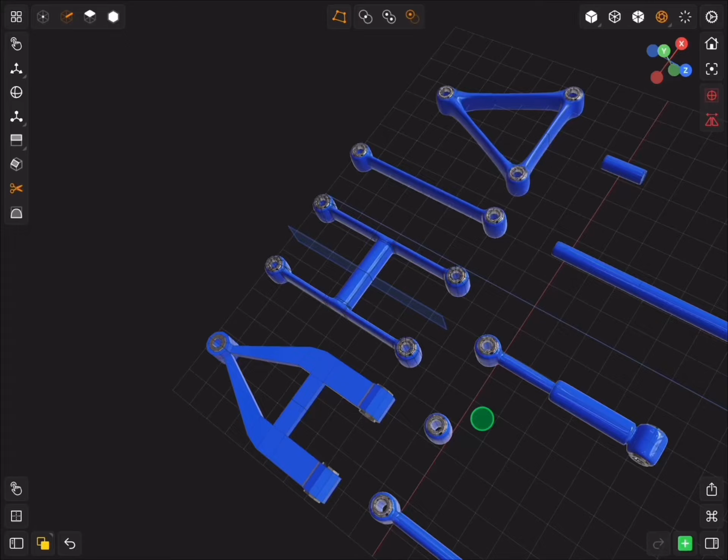Everything was going well until I added to this object.

In this tutorial, I will show you how to create hard surface kit bash using Valence 3D, so we can use it on later projects to speed up the process.

Add a tube, reduce the inner radius to 0.200 and change the angle resolution to 10.

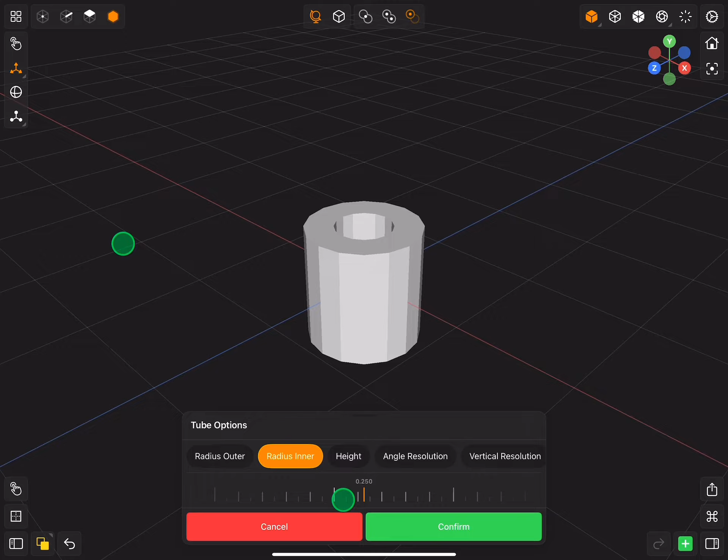Switch to face selection and select everything, then move it on the x-axis. Switch back to the mesh selection and you will notice that the pivot point is still in the middle, and this is exactly what we want.

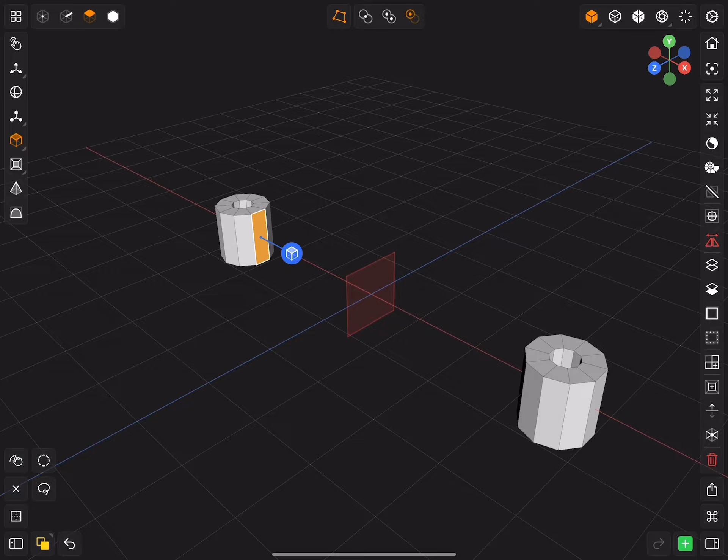Add a mirror modifier. Now select the face and extrude it. Delete the face. Select the edges and enable snapping by holding one finger on the empty space, then move it to the middle. Add loop cuts in the top and bottom of the tube.

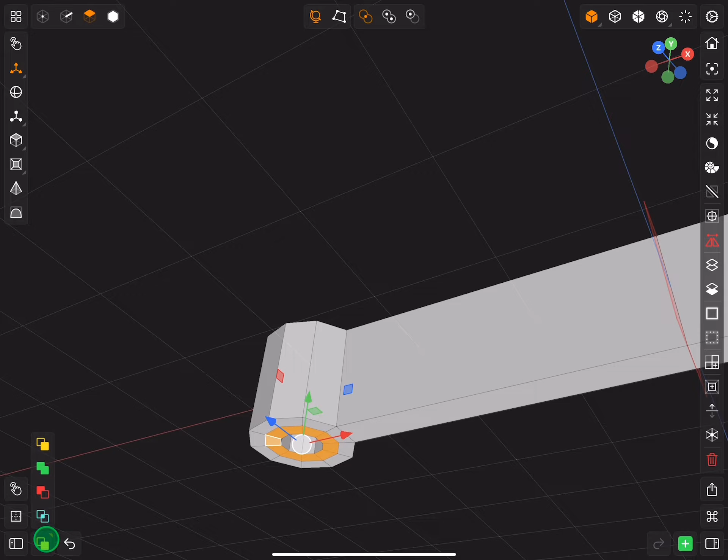Select the new faces and extrude them. Grow select one time and create submesh. Change the color and back to the mesh selection.

Duplicate it and move it away. For the next object, apply the mirror modifier.

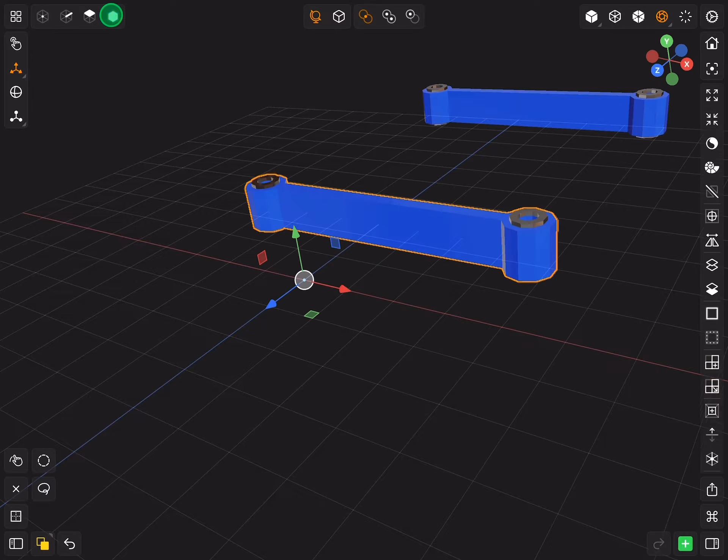Go to face selection, select everything and move it on the z-axis. Add a new mirror modifier and change the mirror plane to z. If you need to adjust the position, go to face selection, select everything and move it.

If you need faces in the middle of the mesh, select the middle edge loop and use the bevel tool. Now select the middle face and extrude it, then delete it.

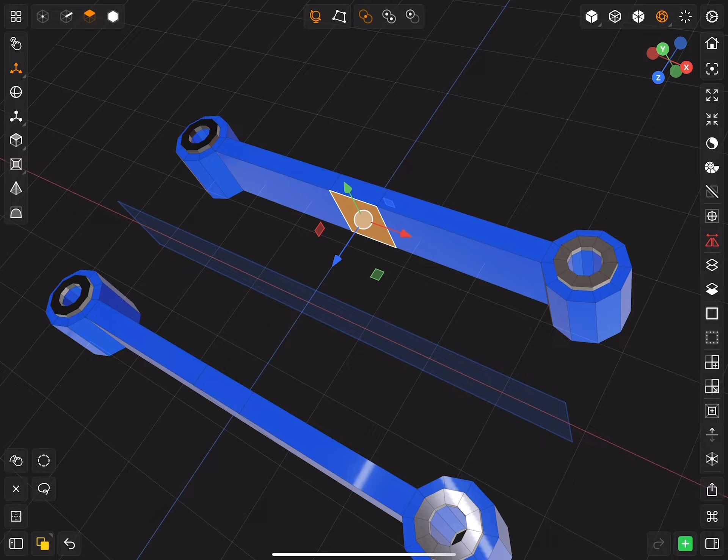Select the edges, move them to the middle while the snapping is on, then move this object away. Insert a new tube, just like what we did earlier, 0.200 for the inner radius, 10 for the angle resolution.

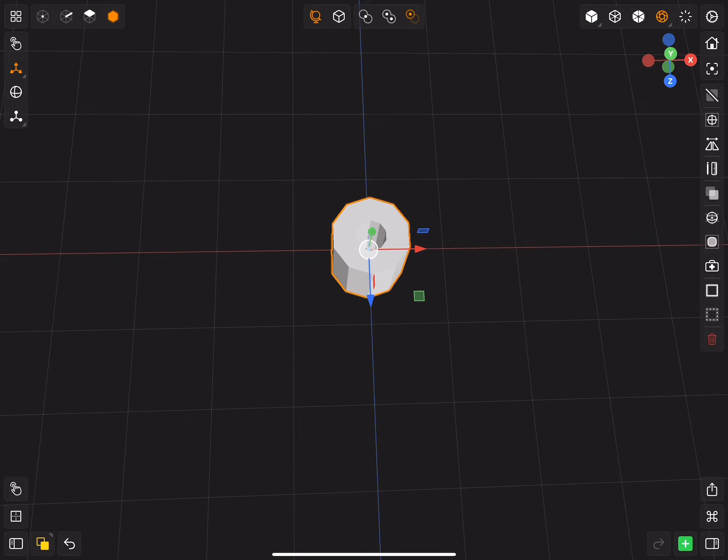Move it away from the center. Insert loop cuts in the top and the bottom of the tube. Select the new faces and extrude them.

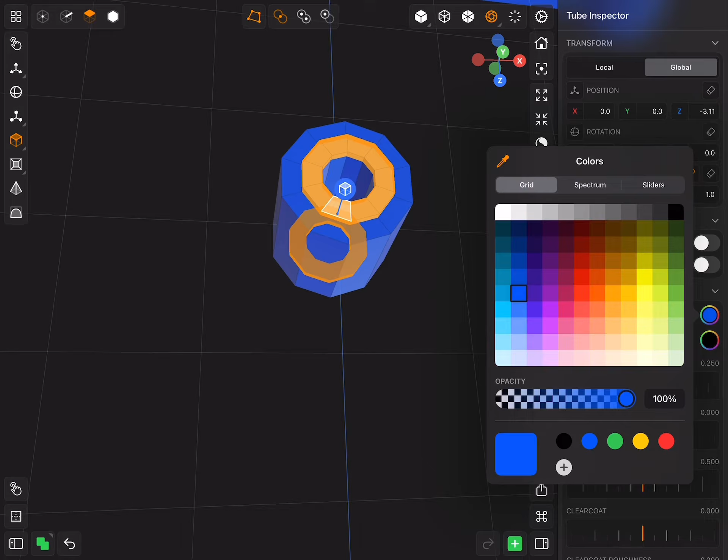Grow select one time. Create a new submesh and change the color. Duplicate it and move it to the back.

Go to face selection, select everything and move it to the right. Add mirror modifier, select the first tube, select half of the vertices and delete them. While still selecting the half tube, select the other one and join them.

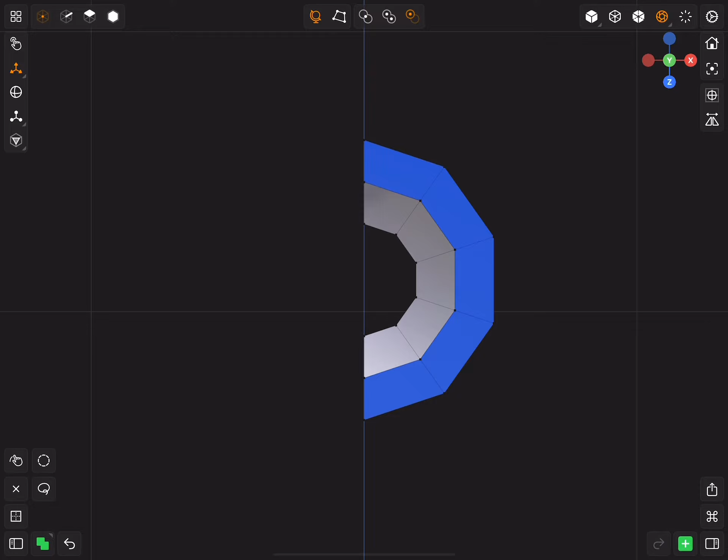Now extrude the middle face and delete it. Select the edges and move them to the middle while the snapping is on.

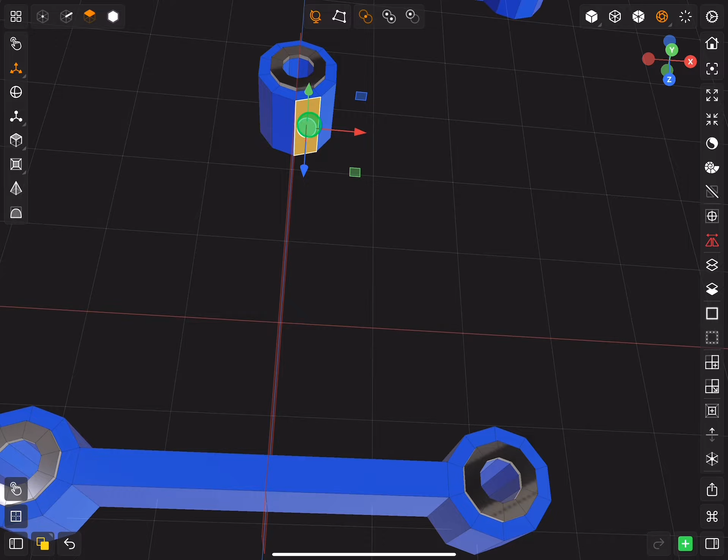Now when I tried to use the bridge tool between the top and the bottom faces, I ended up with 3 faces only. The face in the inside wasn't created. And it was a sign that my next step will crash the app.

Okay, let's try it again, but this time extrude the top face only, then use the bridge tool.

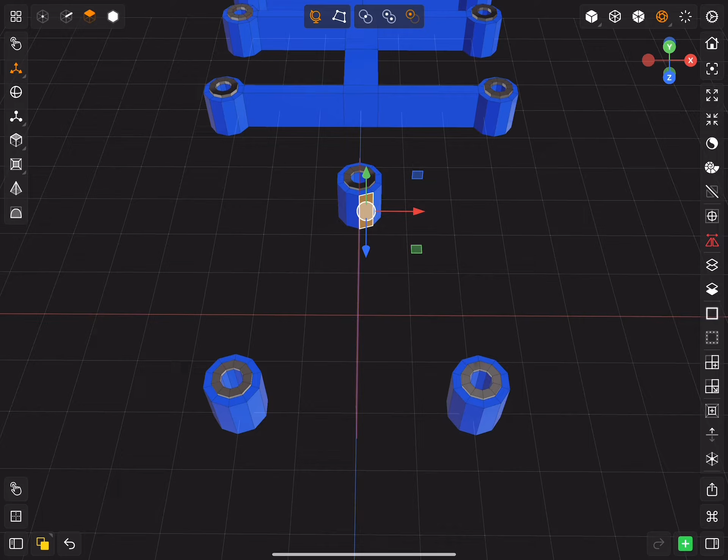You can select the extra loop cut and dissolve it.

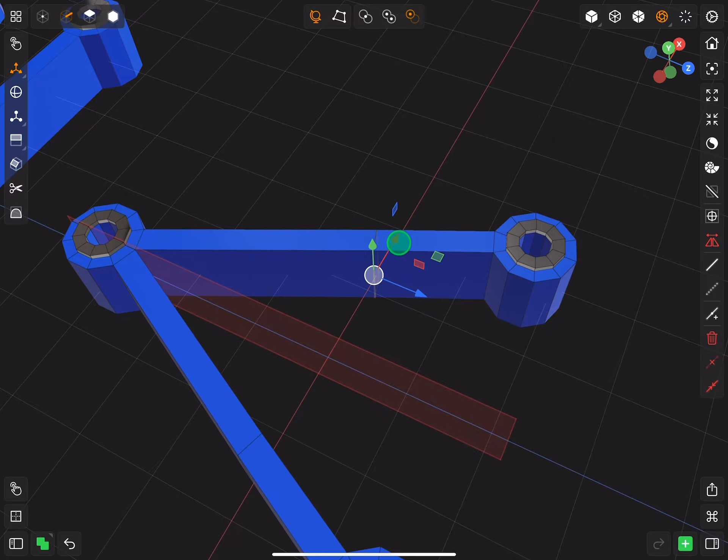Now select the face and extrude it. Delete the face, select the edges, then move it to the middle. And the third object is ready.

Move it out of the way and add a new tube for the next object. Use the same settings, 0.200 inner radius, 10 angle resolution.

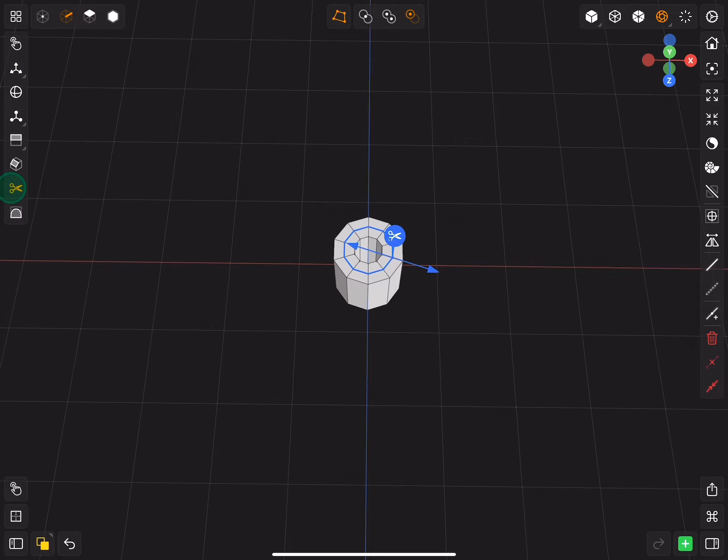Add loop cuts and extrude. Grow select one time, create a new submesh and change the color. Make copy to use it later, which I should've done on the first of the video.

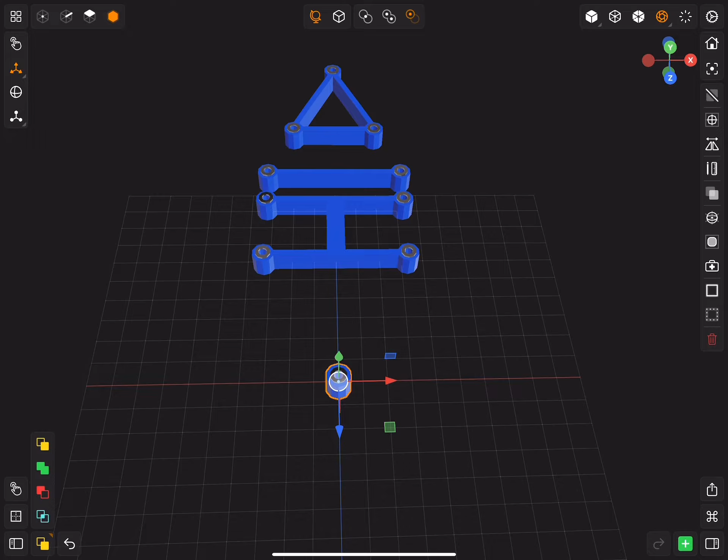Now duplicate the first object we created earlier, rotate it 90 degrees on the x-axis, disable the mirror modifier and rotate it 90 degrees on the y-axis.

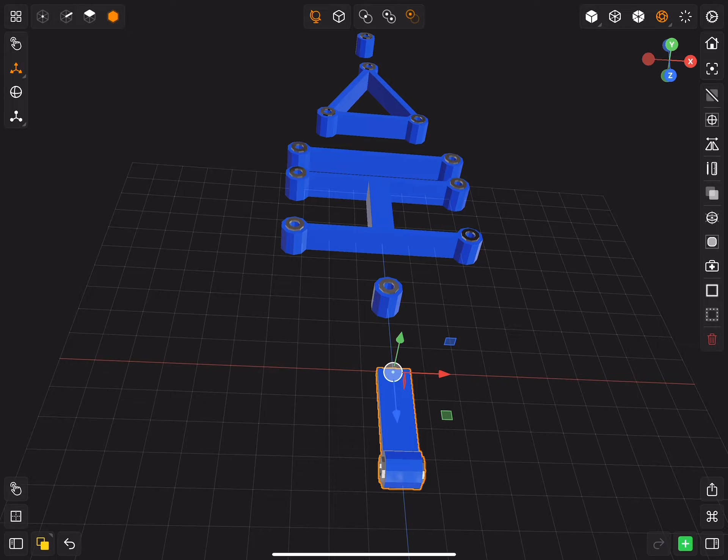In the edit mode, select everything and move it to the side. Back to the mesh selection and add mirror modifier. Change the mirror plane to Y.

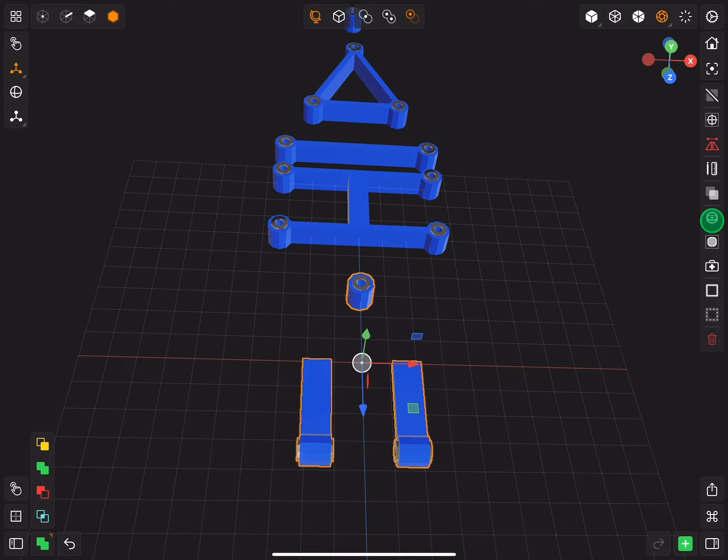Delete the right half of the tube. And while still selected, multi-select the other object and join them. This way the mirror modifier will be applied on the tube too.

Now add 2 loop cuts. Extrude and delete the face. Select the edges and while the snapping is on, move them to the middle.

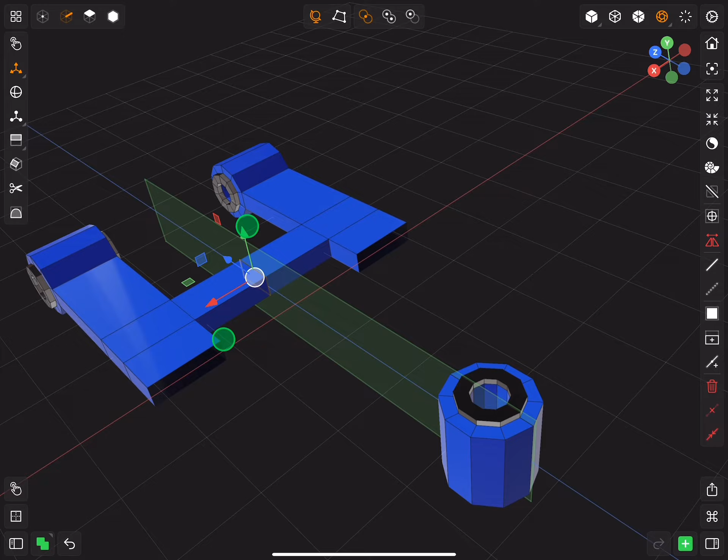Select the edges on the other side and scale them down on the x-axis a little bit. Add a loop cut to the tube and use the bevel tool one time.

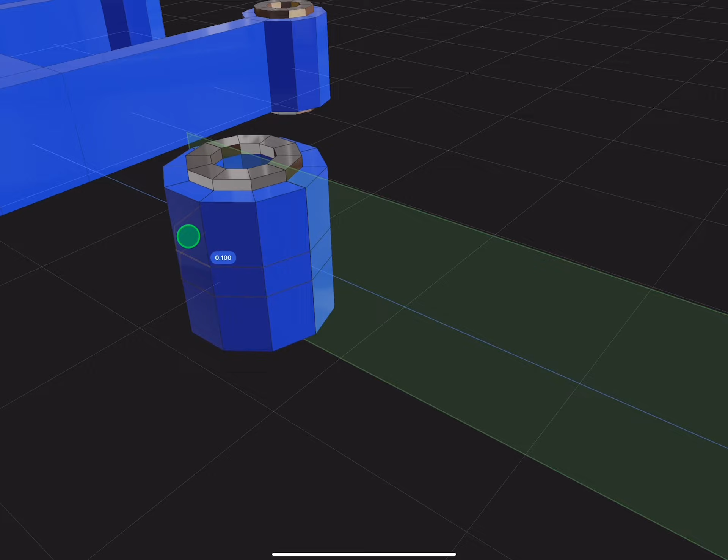Select the 2 faces and use the bridge tool. And adjust the shape if you need to.

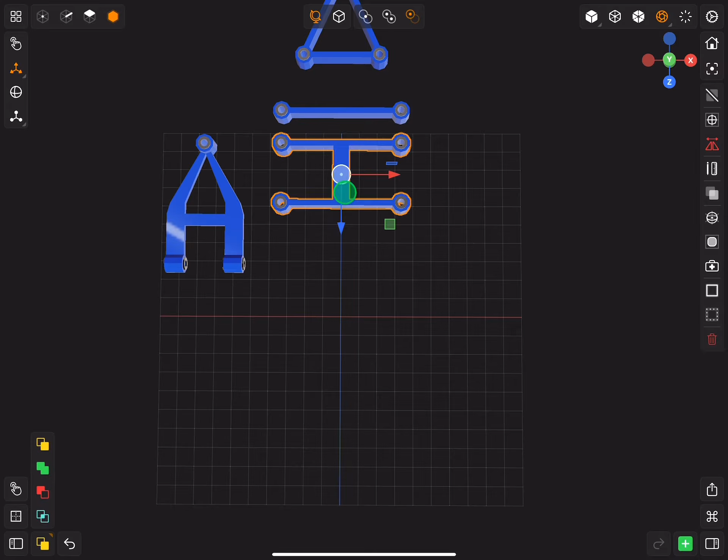Duplicate the first object again and disable the mirror modifier. Rotate it 180 degrees on the x-axis.

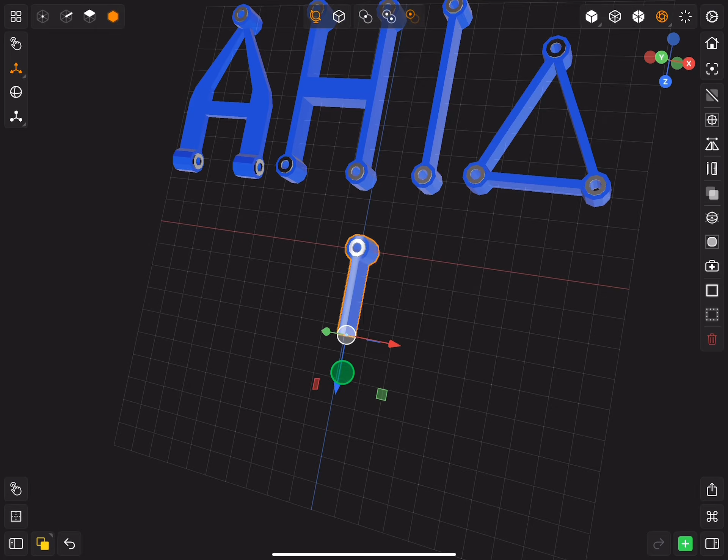Add loop cut near the tube. Select the long faces and scale them down on the y-axis.

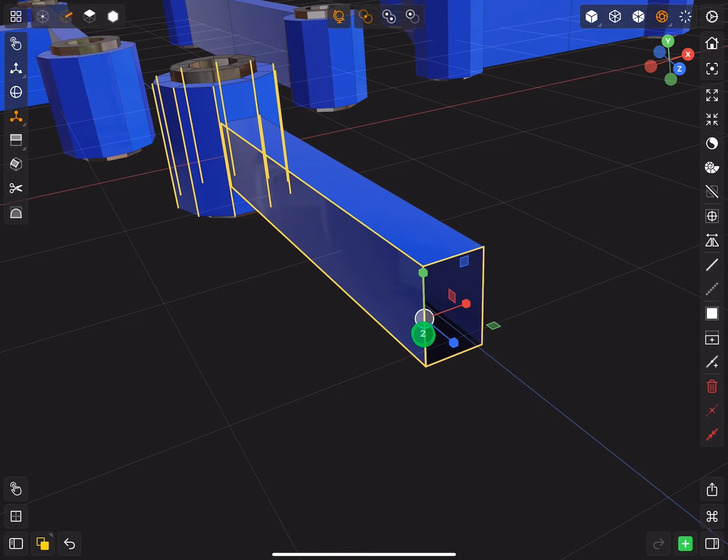Close the open face and add 2 loop cuts. Select the new outside edges and scale them up on the X and Y axis.

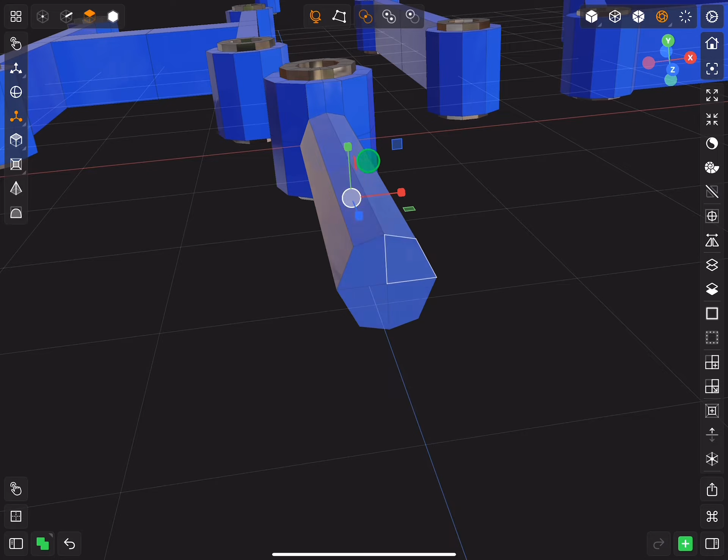Make a copy of this object and move it to the side. Duplicate it again. Rotate it 180 degrees on the x-axis. Now rotate it 90 degrees on the z-axis.

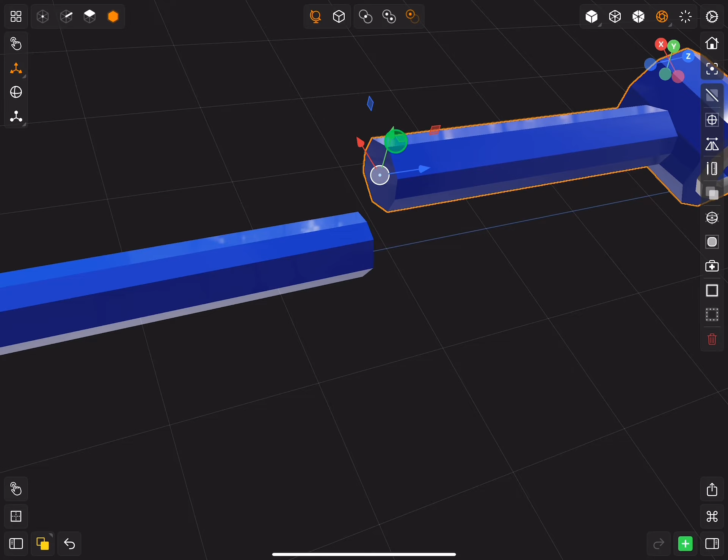Select the long faces and scale them up. Adjust the position. Insert loop cut.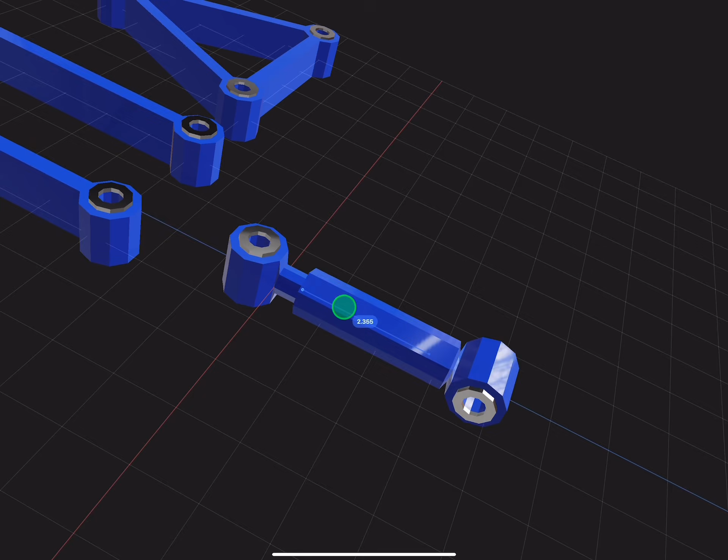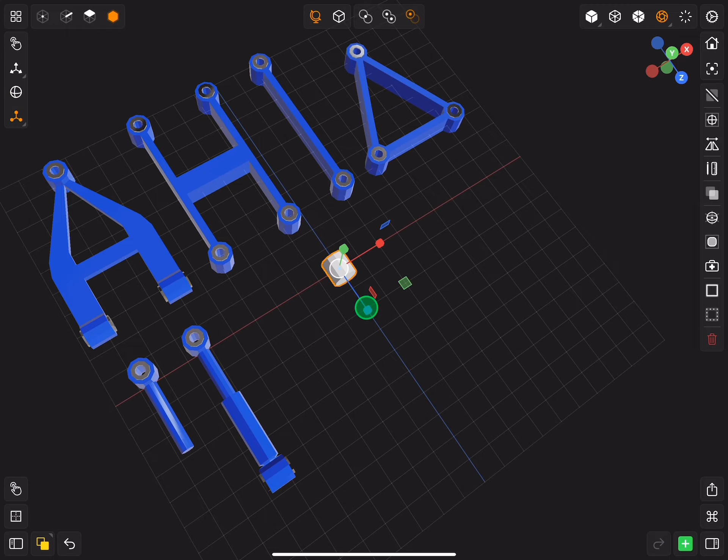Now add a cylinder. Rotate it 90 degrees on the x-axis. Inset 2 faces on both ends and extrude them.

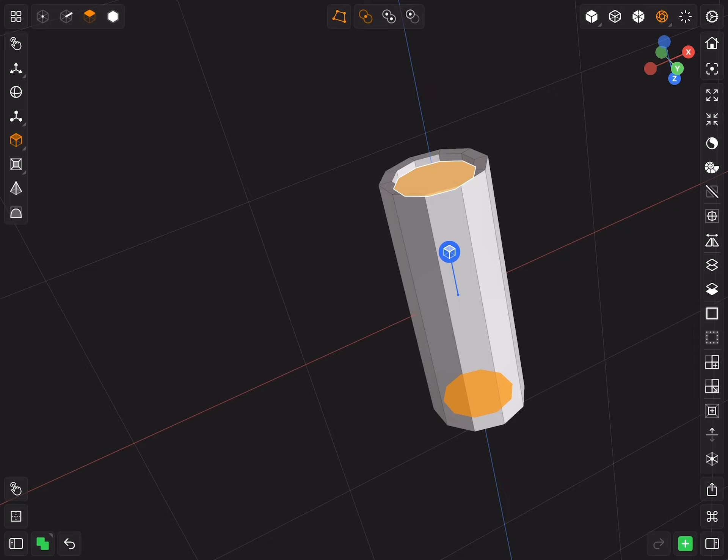Create a new mesh and change the color. Make a long version of it and we are done.

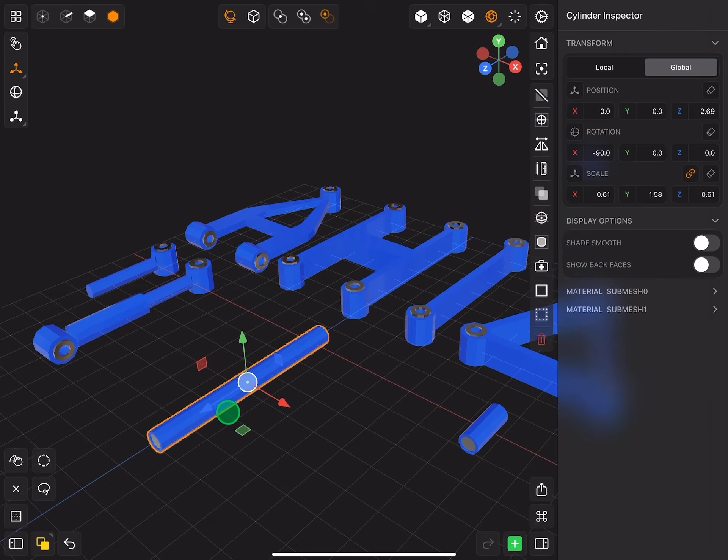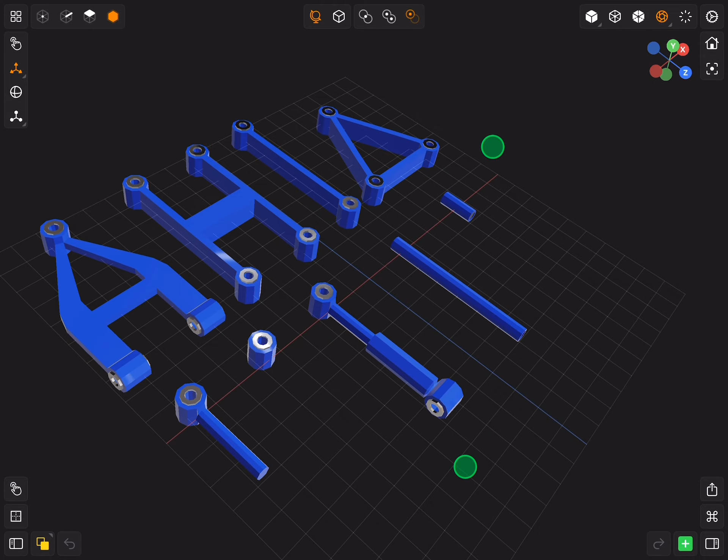Also, you might want to add more loop cuts around the edges if you want to use subdivision modifier.